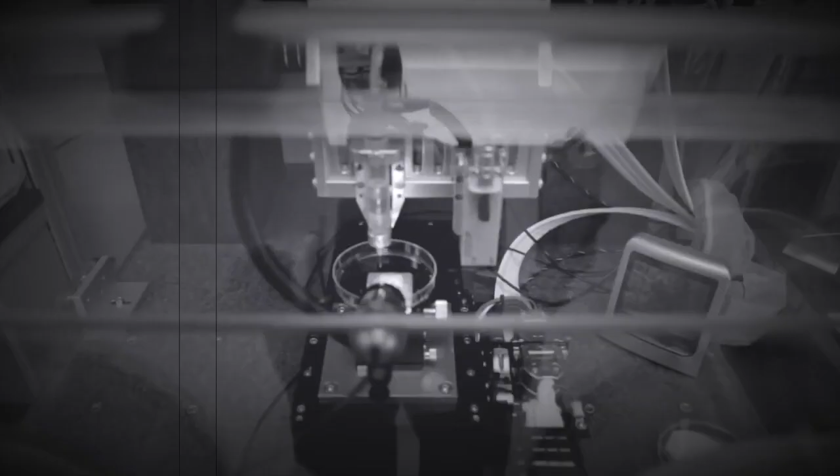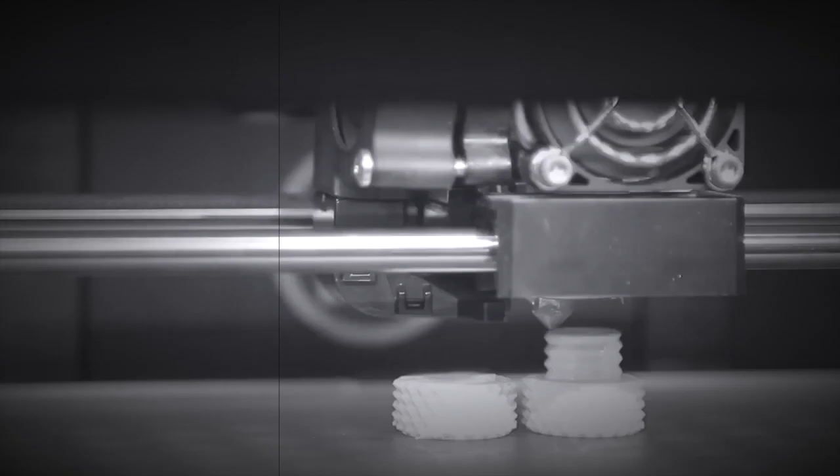A machine that can make copies of almost anything.

Welcome back from the intro. So, the keyboard that we're going to be designing is actually based on a pre-existing circuit board. And that circuit board is the Nein. It's a 9-key macro pad from 40% Club. You can see the URL up here. We'll also have that link down below. And yeah, essentially it's just a 9-key keyboard or keypad.

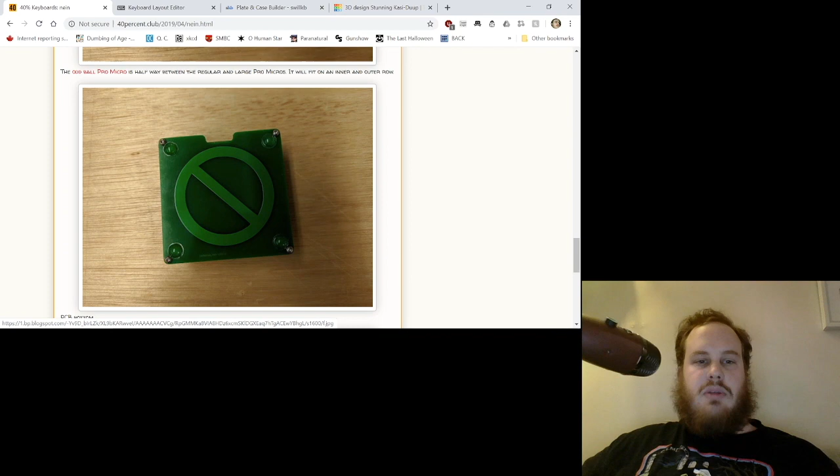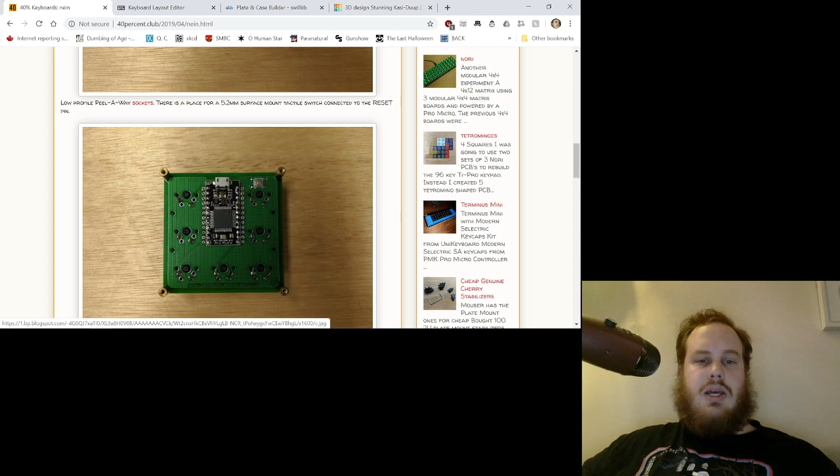Typically it comes in 3 parts. It would come with a bottom plate, a top plate for the switches, and the circuit board itself. The circuit board here has some advantages. It's designed to work flipped in either direction, so it doesn't really matter which way you put up on the top, it'll work either way. And it also works with all the different variants of Pro Micro Arduino clone controllers, so that's handy.

And the firmware exists on a few other sites. Like, everything's kind of already set up for this keyboard, so it's a great starting point if you're not sure what you're doing with mechanical keyboards. So yeah, let's get into this. So I've already downloaded all the files from here, and we'll go over that in a future video a little more in depth.

So what I'm going to start doing is I'm going to go to the keyboard layout editor, and if we look back here, we see it's 9 keys, so it's a 3x3 grid. So what we're going to do here is we're going to set this to a blank layout just up at the top in the preset, and we're going to add 3 keys. Now once we have the 3 keys selected, we can just do Control C and then Control V, and you can use your direction pad on your keyboard to move these around, and they'll move by quarter increments.

And that's the standard sort of increment, so to speak, for most mechanical keyboards. Everything's a quarter or variant of a quarter, or like a multiple of 0.25. So now that we have this laid out here, there's the 9 buttons. I almost said 6 buttons, 9 buttons. We don't really need to do too much here in that regard.

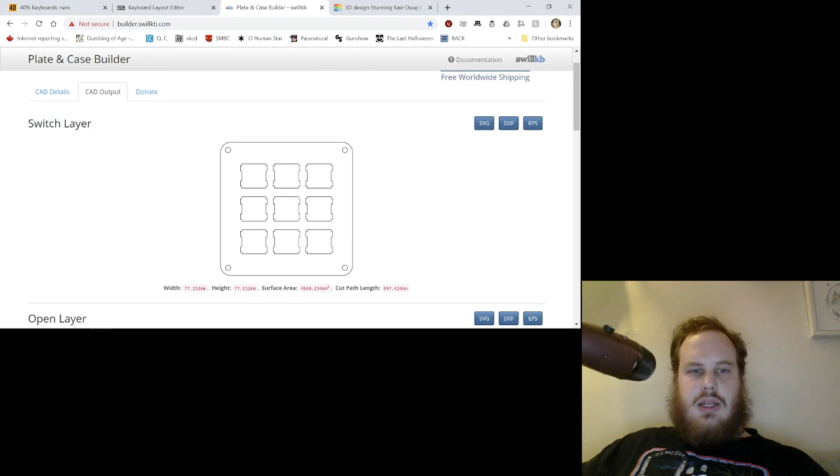Yeah, I might move those circles in a little bit more. So let's do 10 and see if that works. It doesn't do anything weird. Because I'd like these to be evenly spaced in there, which it looks like they are now, or as close as possible without messing up other things. So that should be good.

And what we're going to do is click this, but you're going to want to open this in a new tab. So you can right click, open in a new tab. This is going to save as an SVG. So let's save as, and I'm going to create a new folder here just to be on the safe side. We'll just call it the Nein plates. And we're going to go in here and save this as switch plate.

Just because the auto-generated title is a little hard to follow. It's a string of random characters, or maybe it's hexadecimal or something like that. I don't know. Doesn't really matter.

And we're going to do this again. And this is the... Oh, let me just go back here and check. Oh, did I make a boo-boo. Let's check and make sure. Oh, yep, I just deleted everything I did. Well, this is fun. Always open in a new tab, kids. Okay. Sandwich. Edge padding.

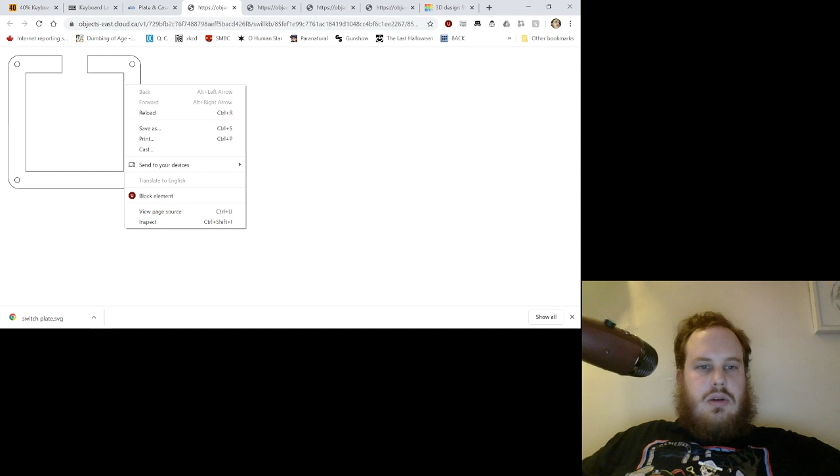And this is what I was trying to do. So this is called open layer, that's called close layer, that's called top layer and bottom layer. So save as, open layer. We'll close that. Save as, closed layer. And closed layer and top layer are going to look pretty much identical. Actually, I think they are literally identical, which is fine. We'll save it as a separate thing because it'll make our lives a little easier. Top layer, and then bottom layer.

Okay, so now that we have that generated and all those SVG files saved, you want to do this as an SVG. If you're using other software or CNC, you might want to use DXF or EPS, but for what we're doing, SVG works great. So I've got a new project open in Tinkercad.

So what I'm going to do here is call this the Nein bottom. We're going to do the bottom and the top as two separate parts. You could do them on the same work area if you'd like, but I like keeping them separate so that it's easier to separate them in the future if you need to.

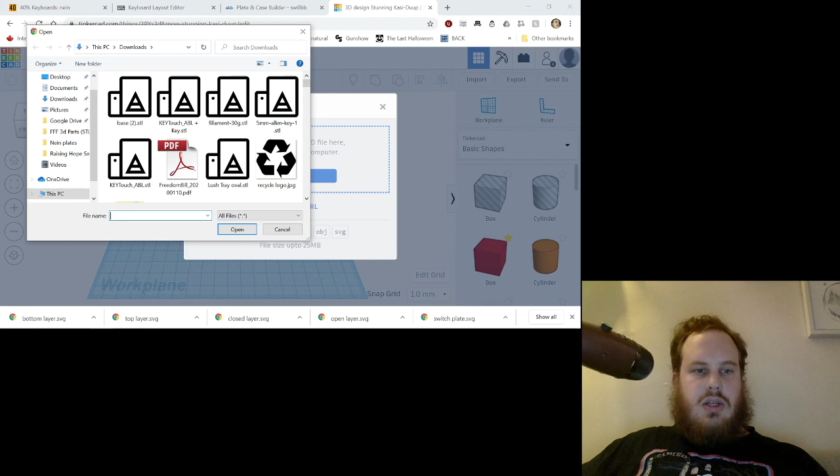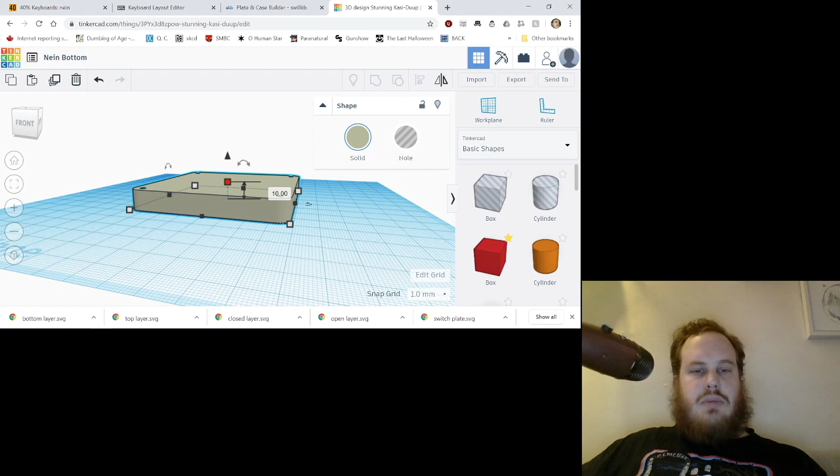So we're going to import an SVG. We're going to go into Nein plates, and I said we're doing the bottom, right? Okay, so what better to start with the bottom than bottom layer? And you want to keep scale to 100, and yep, just click import. It'll import it here, and it should automatically extrude your SVG into a three-dimensional file. So what I like to do, which you can make these as thick as you want, but what I like to do is have them be 3 millimeters thick for each part.

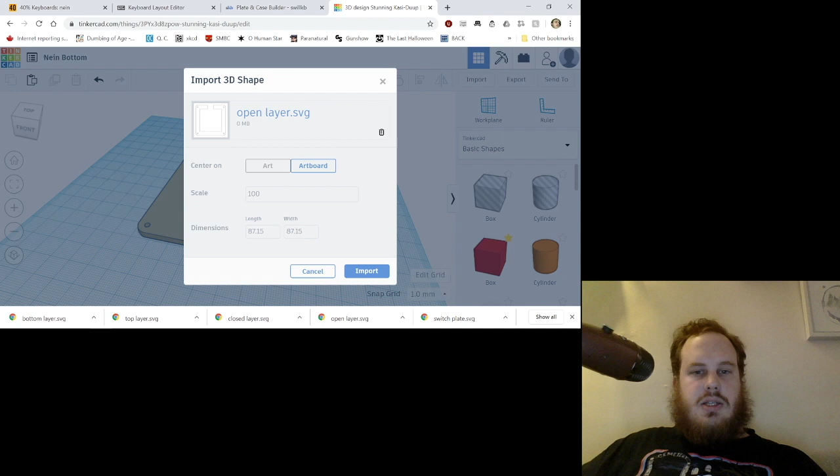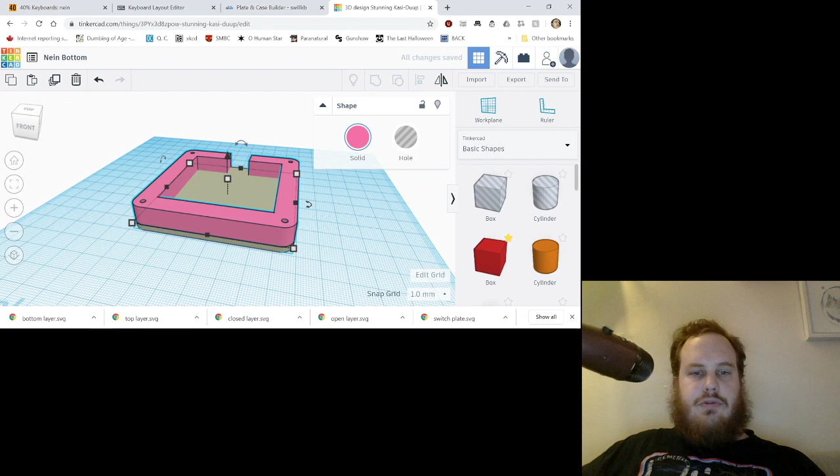And that works great for me. And then what I'm going to do is just keep importing the different layers. I might actually skip the closed layer and just have an open layer take its amount. So let's import this. So that is now on top and through. I am going to scoot it so it's just on top, and we're going to merge these in a second. If you're not familiar with Tinkercad, we might do a video on that in the coming weeks.

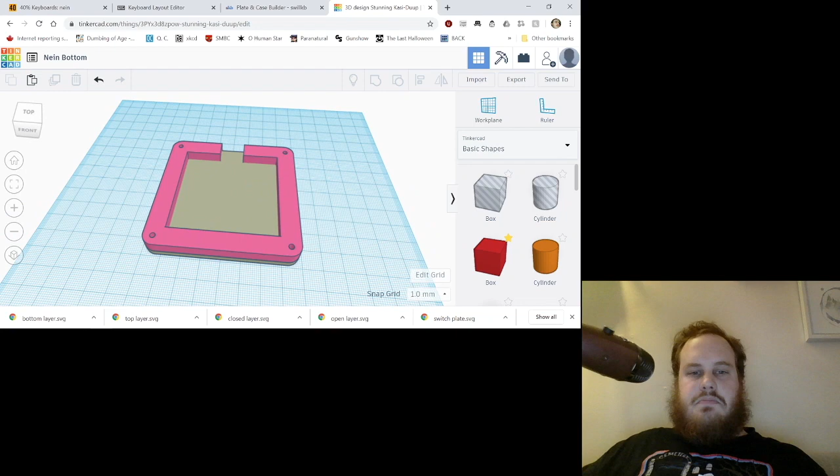I've tried doing a video on it before and there were some weird computer issues, but it should work perfectly fine now. So yeah, we're going to set this to 6 millimeters because it's the equivalent to 2 layers, and depending on how your experience goes with this, you might want to increase it or decrease it. It's really based entirely on your preference. I think actually I'm going to increase it by another amount. I'm just going to go up by an interval of 3 and get it up to 9. I could have probably left it at 6 and it would have been fine.

I want that extra little bit of thickness in there. And the great thing about doing it this way with 3D printing is if you're not exactly sure how thick it needs to be, you can adjust and you won't have any real problems with that. So yeah, you can always kind of just adjust, like reprint, and it won't take a whole bunch of material.

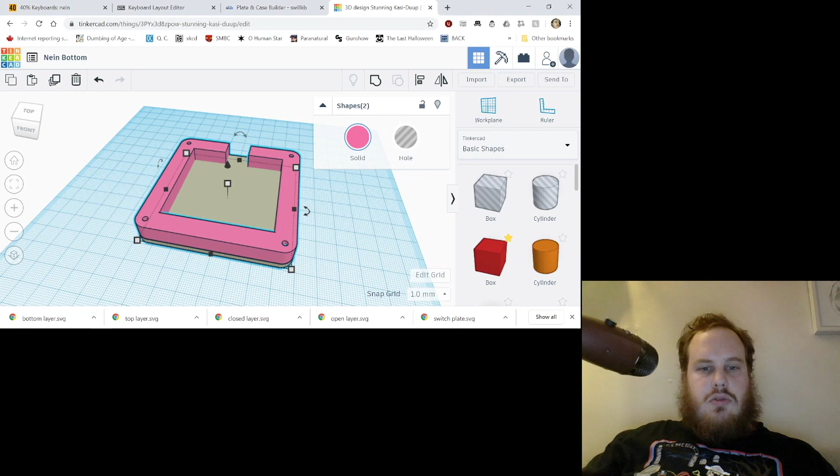Okay, now I am going to merge this. I'm going to go pink and brown, and we're going to go up here and merge objects, or group objects, I believe is what they call it now. So we have now made the bottom case for our keyboard.

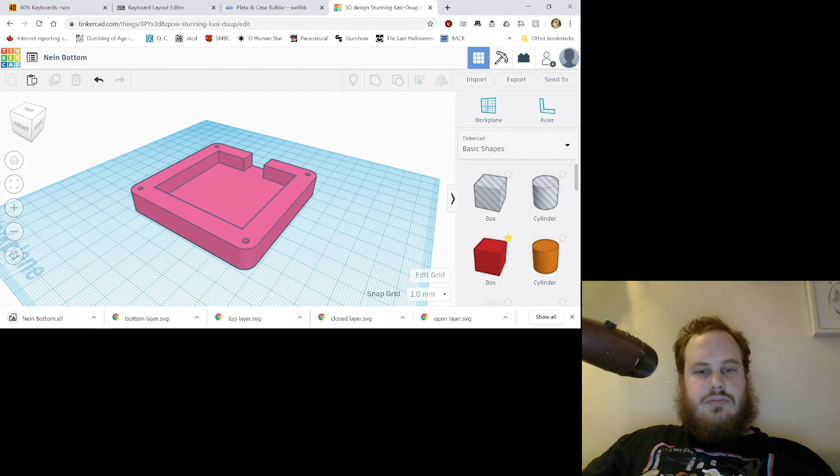So what we can do now is export this as an STL. Lots of sounds today.

Alright, so I'm going to go back to the main Tinkercad dashboard, and we're going to start a new project, and it's going to use the top layers. We're going to do a similar thing.

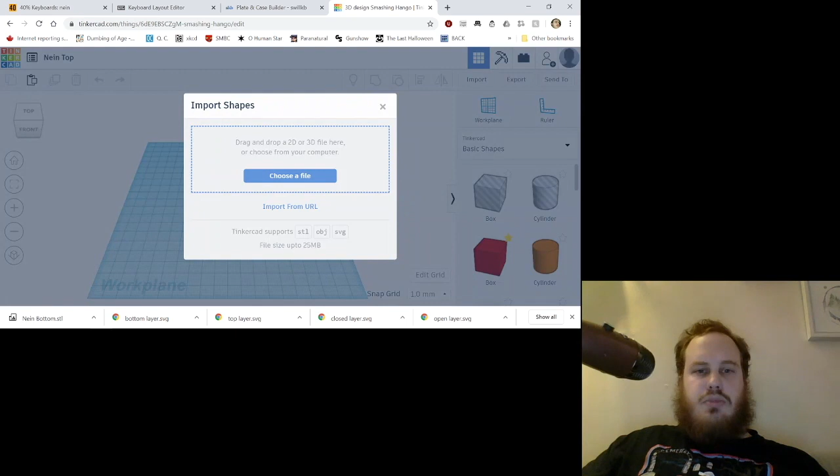So click Create New Design, and we're going to call this 'Nein Top'. Click Import, choose a file, we're going to do switch plate, import, and it's probably going to do the same thing. It's going to import as a default of 10. This is something you definitely want to keep around 3 millimeters thick.

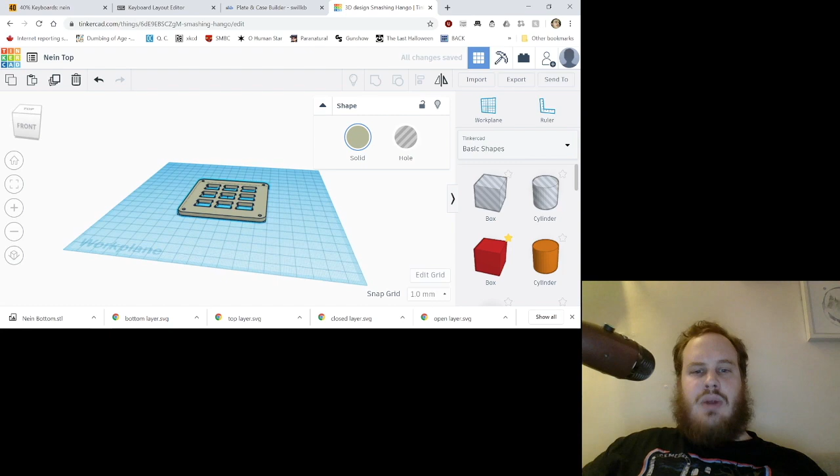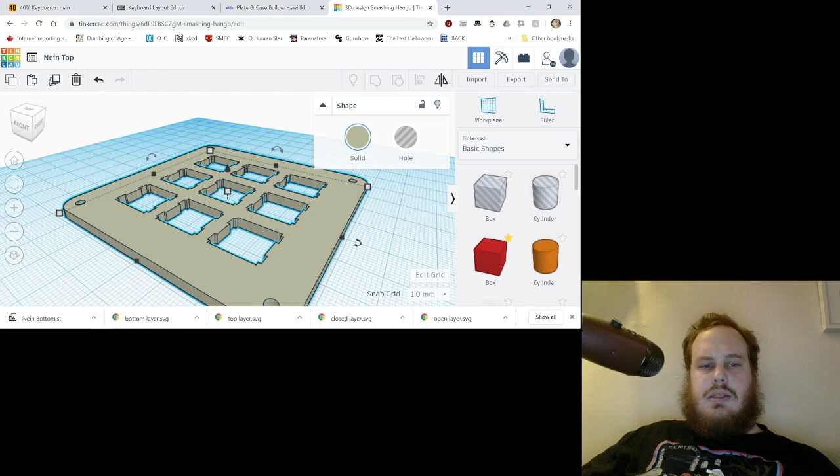Ideally, you would want to make it a little bit less than 3 millimeters, or you can modify it a little bit to have the switches clip in. It isn't too important that the switches clip in because they're going to be held in place primarily by the circuit board in conjunction with this, but it's always good to keep things as they are.

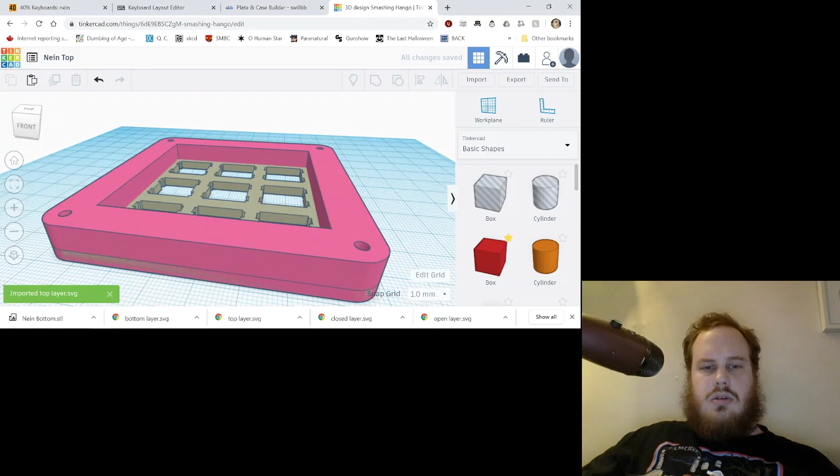So let's choose a file. We're going to import the top layer. And in this case, we can actually leave it intersecting with that. Let's set this to, yeah, let's just set it to 9. It'll be a little thick, but it'll be like a high profile case for the keyboard.

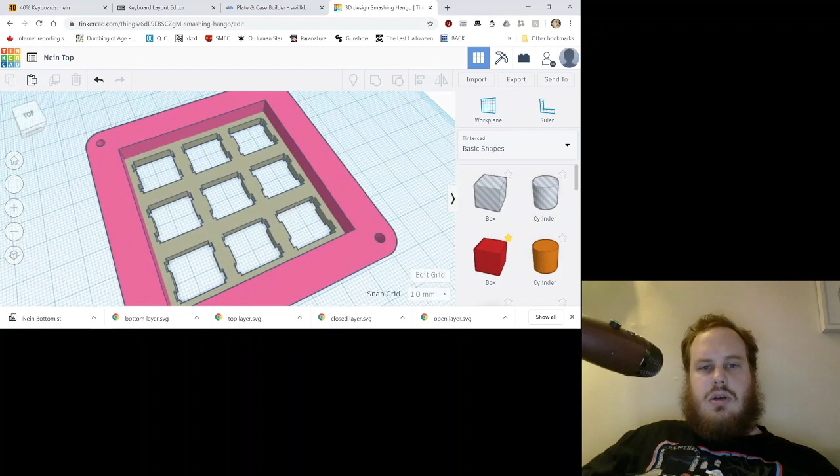And that should kind of cover up switches if you're one of those people who doesn't want to see the switches on their keyboard too much. You can always remove this top layer if you want to just have the switch plate. I know some people like just having the switch plate showing, so we're going to do the same thing we did with the last one and merge these together, or group them I should say.

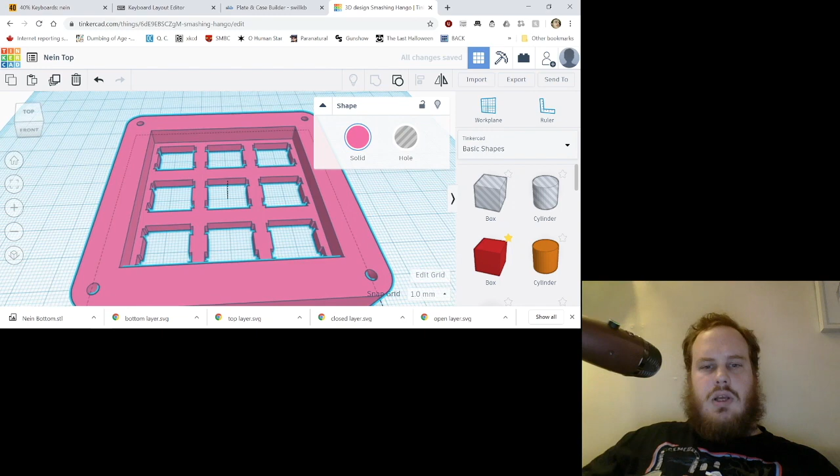What you can actually do here, if you want to, you can take a little box, and we're actually going to shrink this down quite a bit. If you're finding that the switches aren't sticking well enough for you, you can shrink this box down to, I believe it's about 2 millimeters or so. Don't quote me on it.

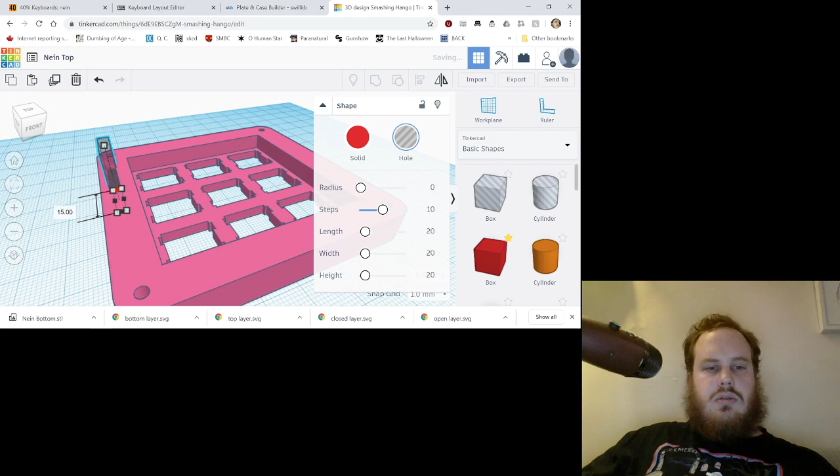Yeah, we'll do. Yeah, let's shrink this down quite a bit. And Tinkercad is freezing up on me. A web-based program, freezing. Lovely. Okay, so we're actually going to make this 5 wide, and that should be more than enough. Yeah, you know what? We're just going to do it this way. 5 millimeters. There we go.

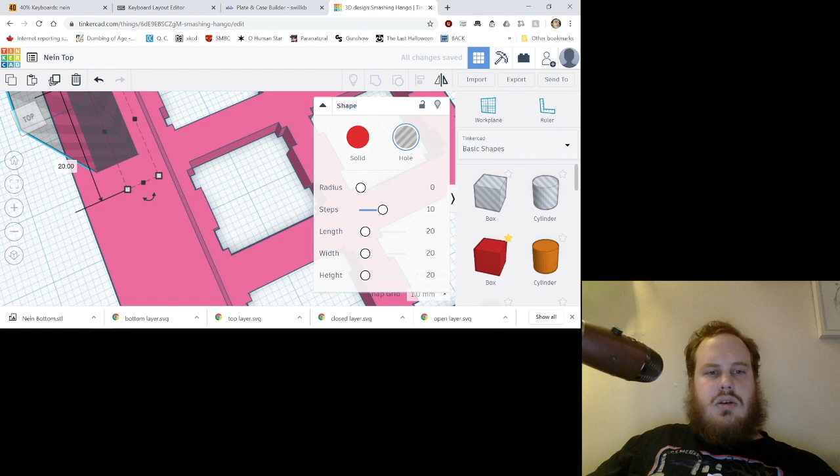And I know that the switches are around 19 across, so what I'm going to do is actually just set this to 20. And what we're going to do is take, oh, that's not what I wanted. I wanted to move this, not stretch it. So we're going to shrink this down quite a bit. Actually, 20 is probably overkill, looking at it now.

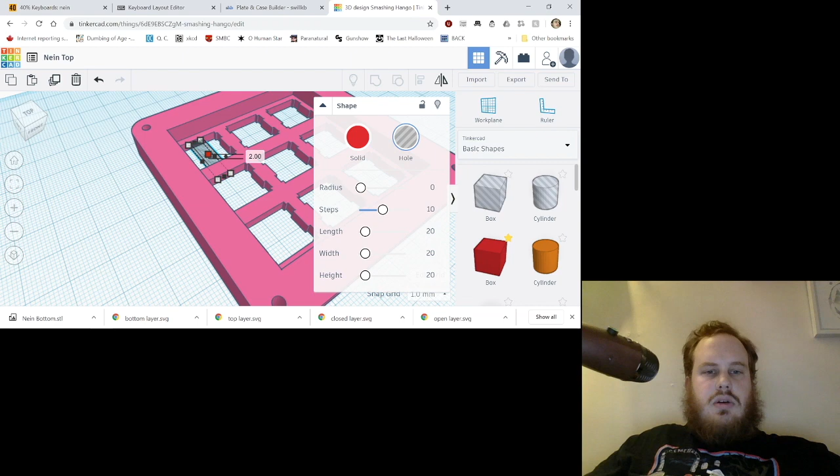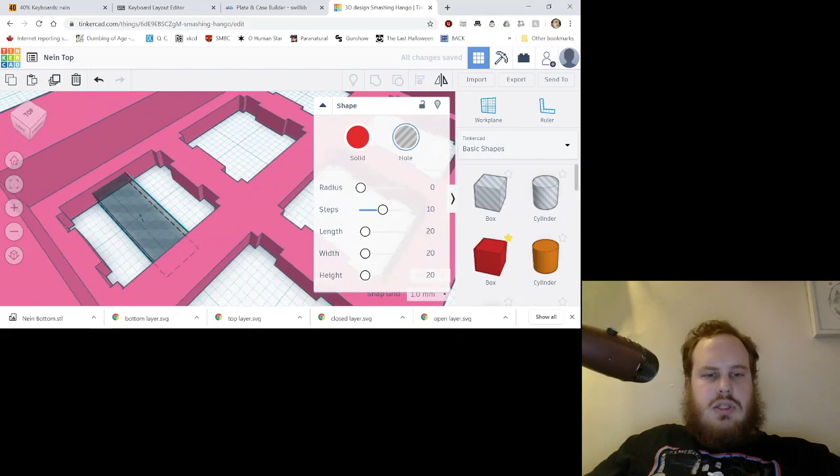And we are going to go about half the height of this. It's small enough that overhangs shouldn't be a real problem. But you can go like this, and we're going to shrink that down just a little bit so it isn't too big. I think that is more than enough. Yeah, you know what, 1 millimeter in on each side should be enough. So let's see this side. Is this? Ooh.

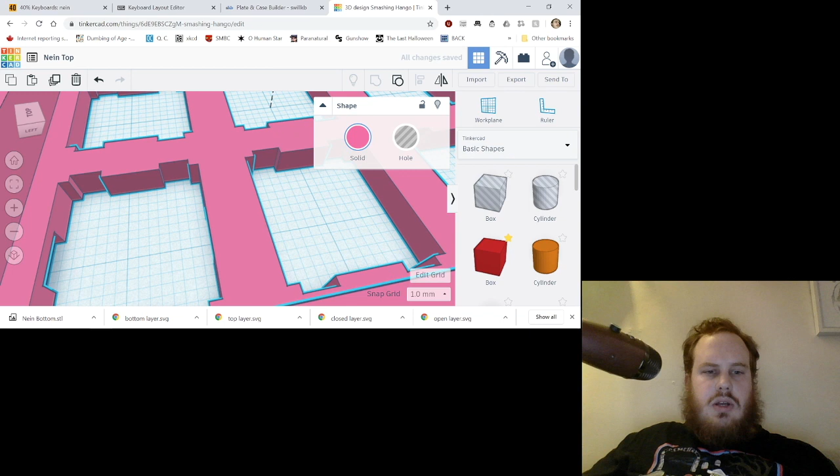Okay, now we're going to group this with that. And what this is doing, it's creating a little cavity here that the clips on the switches themselves can stick to. So that, oops, sorry, just moving everything here. That will allow the switches to stay stuck in there. So,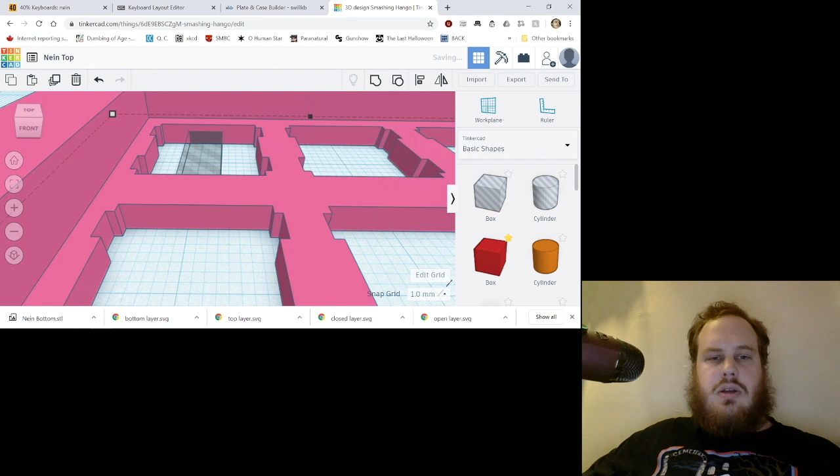Yeah, you don't need that per se. I'm actually not going to include it in mine. I'm just going to export this as an STL, and what you can now do, you can open up your slicer.

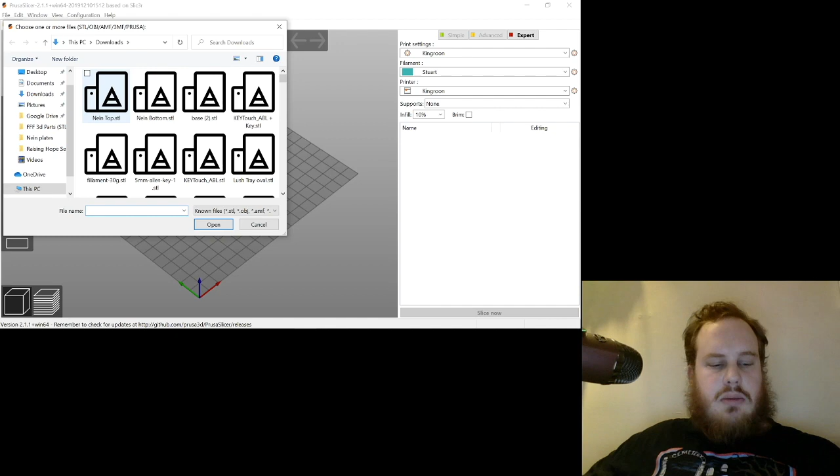I'm using PrusaSlicer. I'll do a video on this for you guys in the coming weeks. And with PrusaSlicer, you just go here, and you can see Nein Top and Nein Bottom. Let's open up the top. And there you go.

You've got your STL that you can 3D print, and that will allow you to make this case rather than having to get it laser cut. So that's pretty awesome in my books.

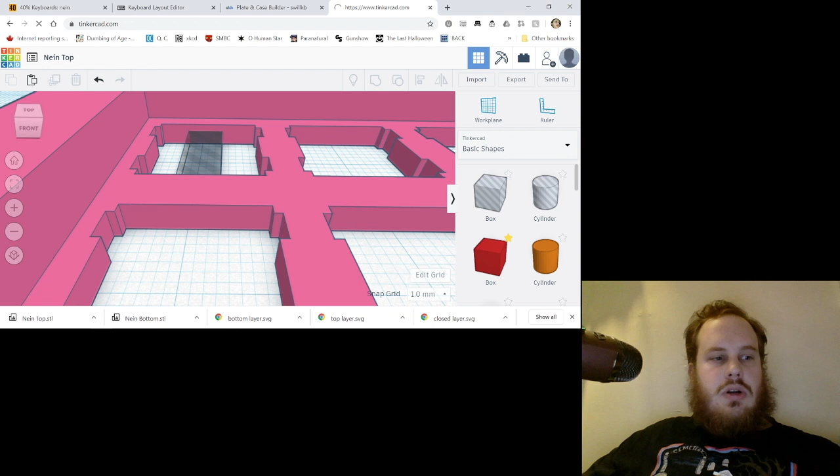Now what I'm going to do, I realize I missed this, I've actually ordered some threaded inserts, some heat set threaded inserts from Amazon, and I'm going to use those on the bottom plate here.

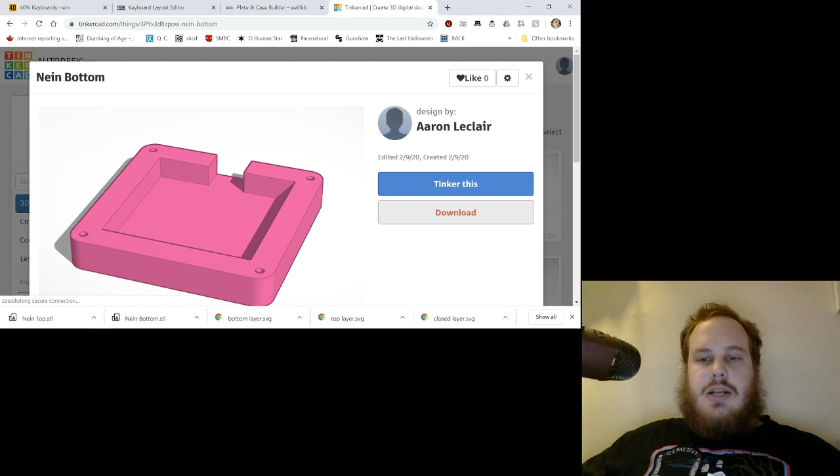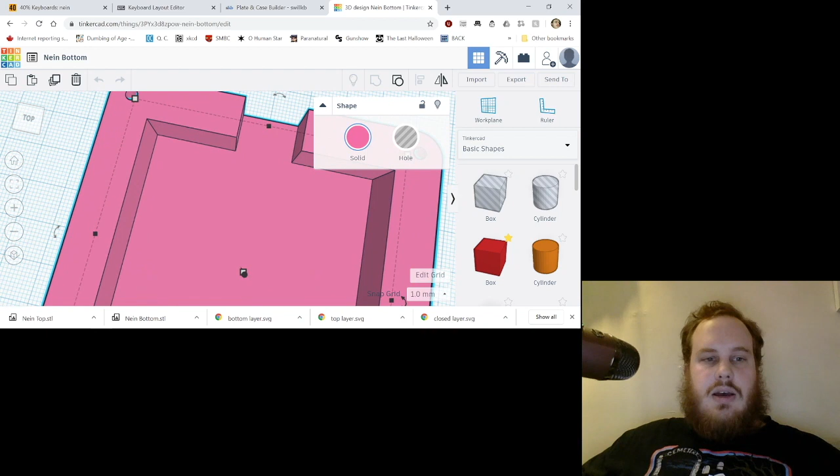And that will allow me to thread in. You can actually thread into these with the screws themselves, the holes will most likely be a little undersized compared to the 3mm of the screw. And from there, you could just screw it straight in. But if you want a sturdier connection, you want to increase these holes right there to have enough space to do the heat set inserts, which I'll show you in a future video of this series, how to do the heat set inserts.

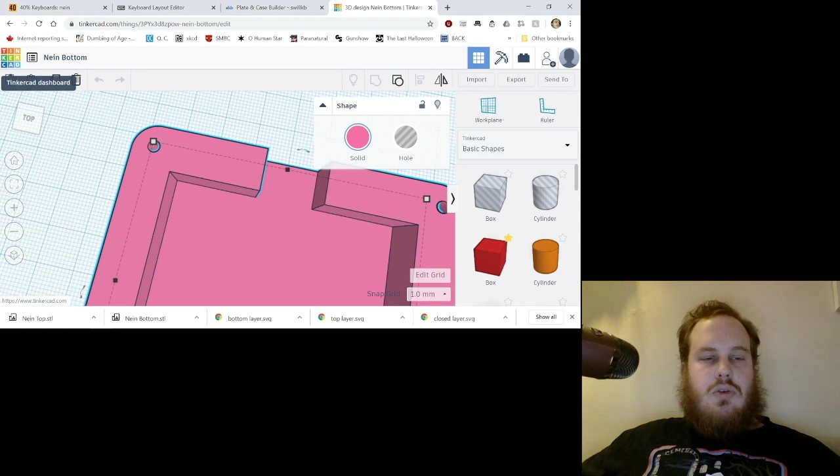But what we're actually going to do, rather than go back and forth, so to speak, and modify this pre-existing one, I am going to create a new project.

And we're going to create a bottom plate specifically for heat set inserts. So we're going to do Nein Bottom Heatset.

What we're going to do is go back to our plate builder, and we are going to increase the size of these holes. The inserts that I've bought, and this will vary depending on which inserts you buy, have an outer diameter of 4.2mm, and you actually want to make this a little undersized. So I'm going to do 4.1.

And let's draw a CAD. Let's see if that worked. Now we're not going to have to re-download all the files here. We're actually just going to need to download the bottom plate file, and the open layer.

So I'm going to open that up in a new tab, and for the bottom layer, I'm actually going to do something a little different. Why do all the work yourself when you can get software to do it for you? So I'm going to take out the holes, and that will give us a bottom that's completely flat and doesn't have any insert holes.

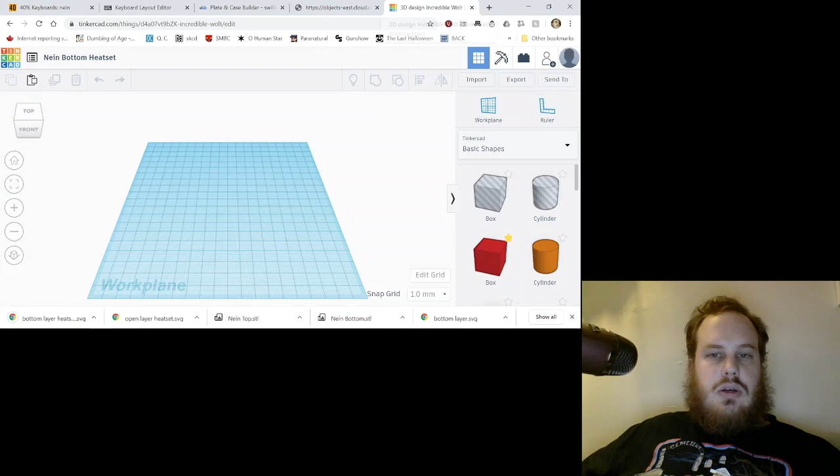Alright, so we're going to import those files. Bottom layer heat set, import. And we're going to change that to 3mm.

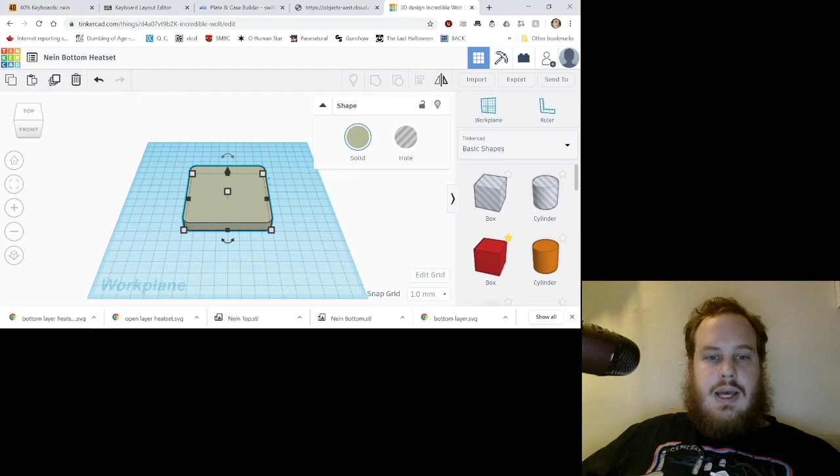If you wanted to add little inset spots for the feet, like rubber bump-ons for feet, you could do little insets for that, and I might show that in a future video. But for right now, I'm just doing a 3mm flat base. What I might do is put some grip tape or some neoprene on the bottom.

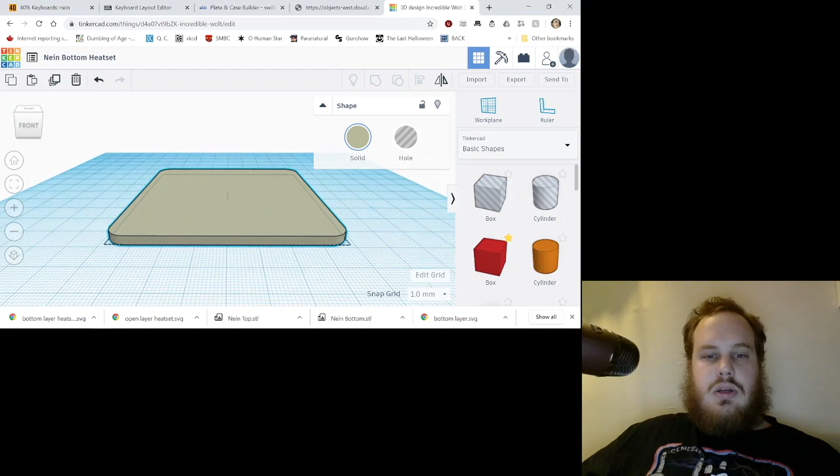And there we go. Choose file, open layer heat set. Okay. Now this, if memory serves, is at 10.

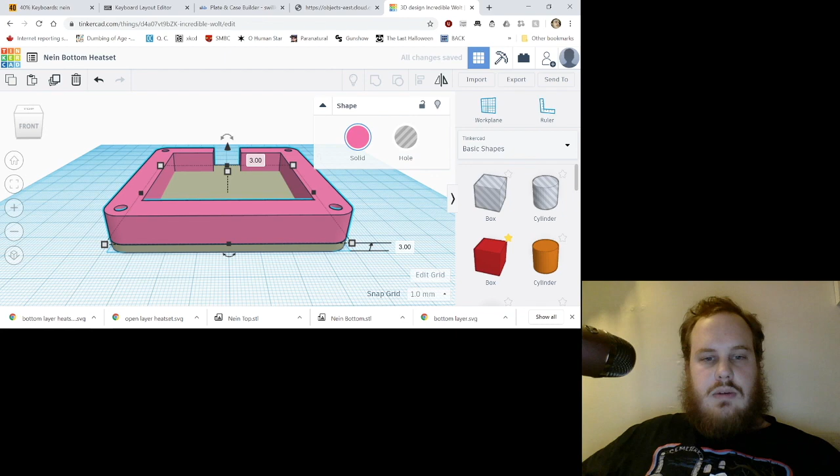For this one, just to account for the heat set inserts, I'm going to give it that extra millimeter. What you want to do with a lot of heat set inserts is give it a little bit extra depth for it to go in, because it's going to push the plastic as it goes in and kind of build up a little wall. So you want to give it a little bit extra space, and that extra millimeter isn't going to hurt us.

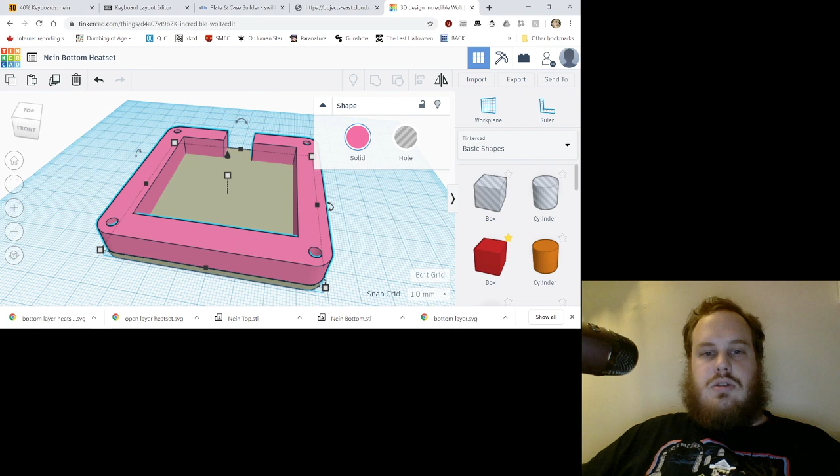I might actually end up changing the other one to being 10 millimeters plus the 3, so 13 millimeters total in height, because it really doesn't hurt.

So, oh, cancel, I wasn't trying to import, I was trying to join. Oh geez, you can tell I'm tired. Okay, so that is done as well. So let's export that. And that should be perfect.

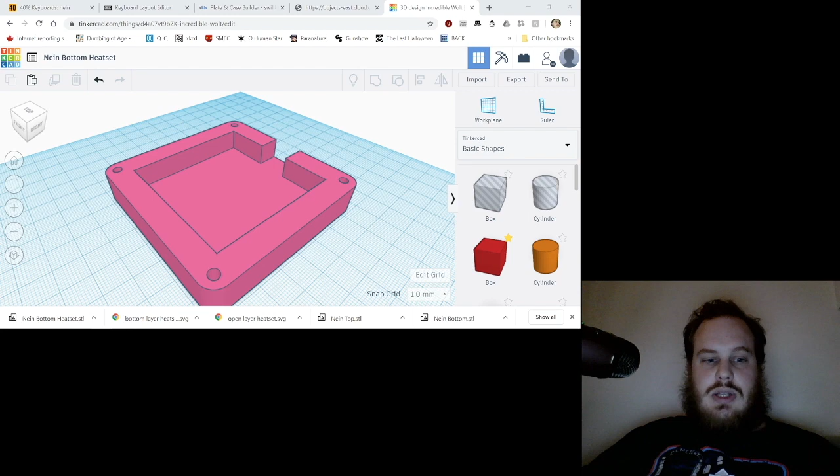And the lights are turning off, which tells me that it is pretty much time for this video to end. And I'm just going to go open up Prusa Slicer, show you guys this file in there, prove that I'm not crazy, I guess. I don't know. I am crazy, it feels like. But yeah.

There we go, Nein Bottom Heatset. And there we are.

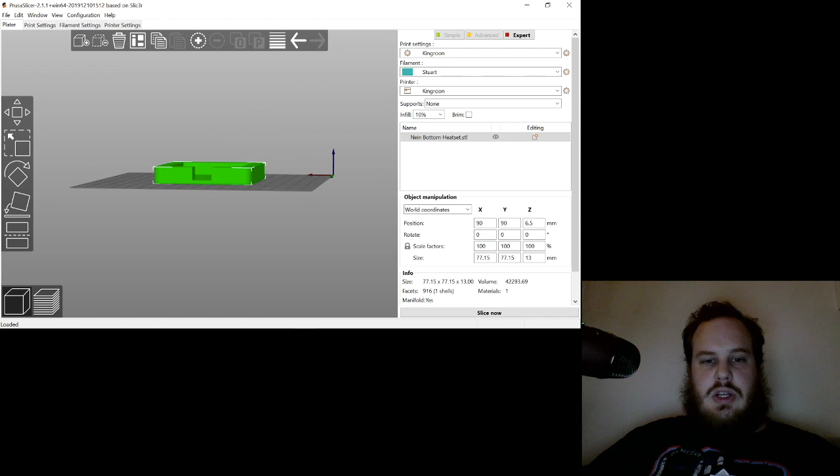And we'll go over the 3D printing of this in a future video, and I'll talk about all the different things you can do to kind of make these as durable as they need to be, different infills, and it'll actually be a bit of a tutorial on Prusa Slicer, which I'm finding is so much better than Cura, for the Kingroon at least. Well, it's better than the default Cura that came with the Kingroon by a long shot. And yeah, I'll show you that in the next video.